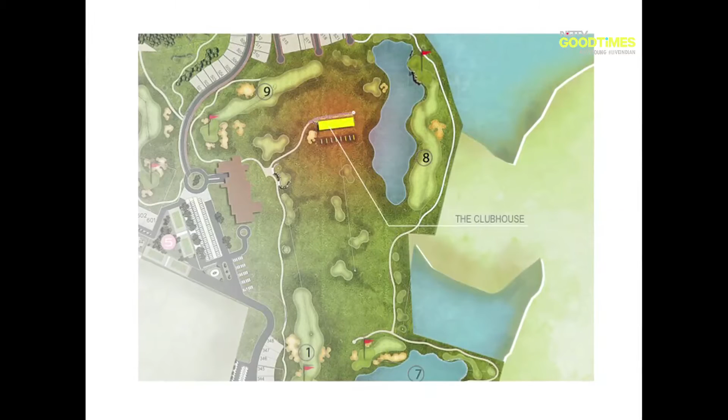So the yellow box there is the site, and all around, as you can see, is the golf course and beautiful views. Considering the location, these are the kind of views you see from the site. So we thought it would be almost criminal to enclose any space at all. We thought of a fabric canopy over, and then we completely lost the walls - so it was just a deck kind of space.

Since these are the kind of views available, we decided to drop the walls and have this light fabric roof. So the only thing left was the floor. The main design element became the floor, and we looked at how to work with it. This is the plan of the area - the white portion is the deck, the seating area with the bar, lounge, and a little cafeteria scenario.

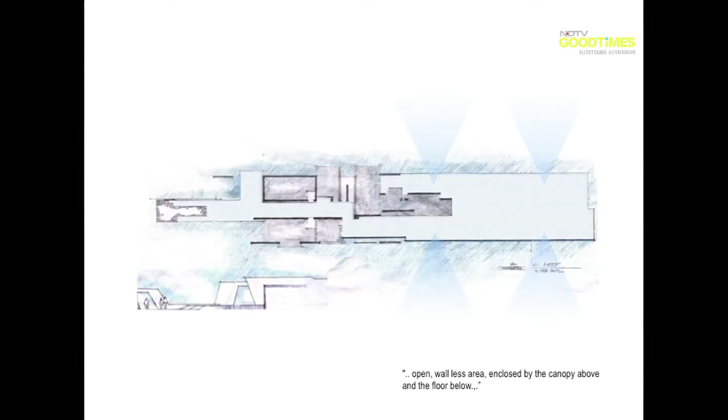When we looked at what kind of flooring to do, we decided on granite because we're in Karnataka, Kolar. This is the kind of thing you see on the way to Kolar, in and around it. The stone seems so light and almost weightless, and in spite of being a very heavy material, we wanted to try to get this quality of lightness, that floating feeling - that's the only thing we focused on.

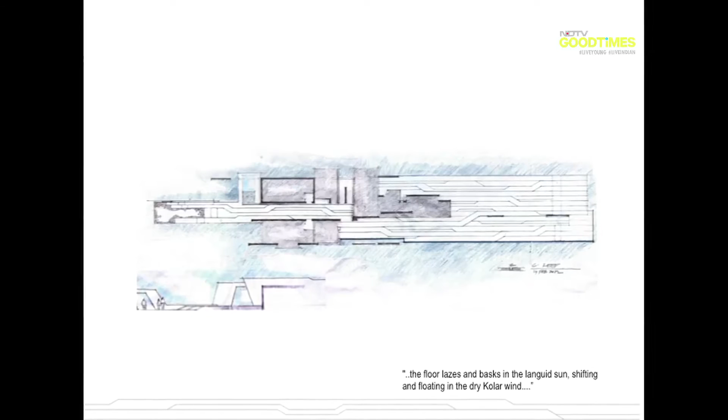So we started off cutting some grooves in the granite and letting it flow. Once we started doing that, we made some models to understand how it was going. Then we felt the lines would make the stone flow too fast, so we had to slow down the flow of the stone.

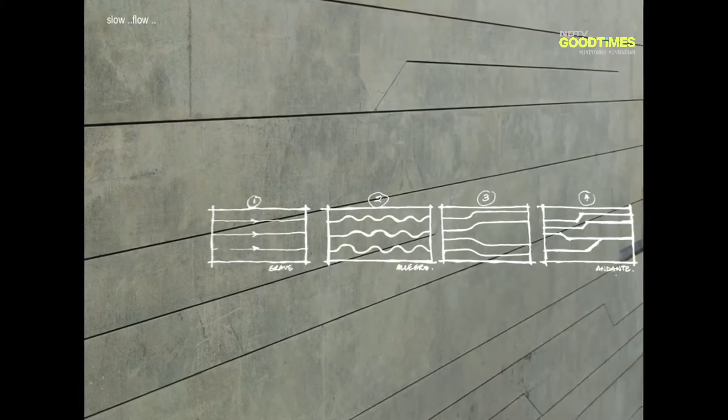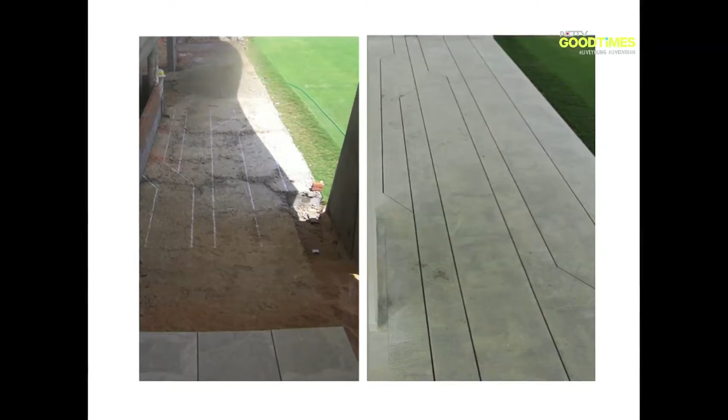For that, we started cutting jogs into it and varying the widths of these ribbons, or the spacing between the grooves. We ended up with something like this, which was a more gentle flow we were able to get with the stone. These are some pictures on site when we drew the lines on the floor to figure it out. All the other joints disappeared once we did these larger grooves.

So the second thing was, since the stone was flowing, we thought we'd detach it off the ground. Instead of embedding it into the grass, we lifted it slightly, about 5 inches, and that had the effect of making the whole thing float over the grass.

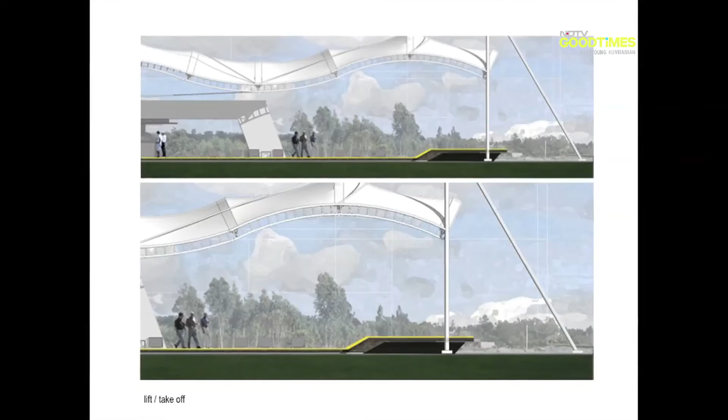Then we decided to look at one end of it at a different level, so some people would sit at a different level, most at the lower level, which can also be used as a performance space. We lifted it up and tilted it, which made it all the more lighter. So we ended up with something like this.

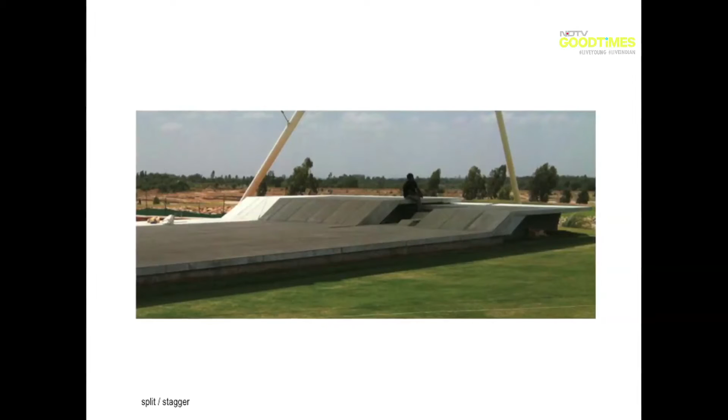When we started doing this, we realized we should split the deck into two to make it even lighter - it had become like a barrier at the end. So when we split and staggered it a little bit, we found it had a much more delicate floating feeling.

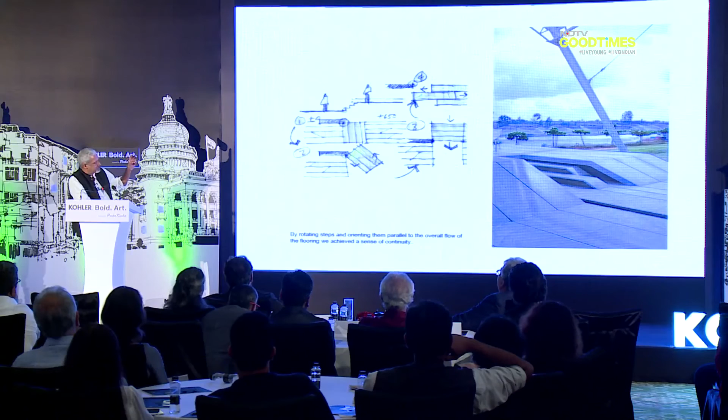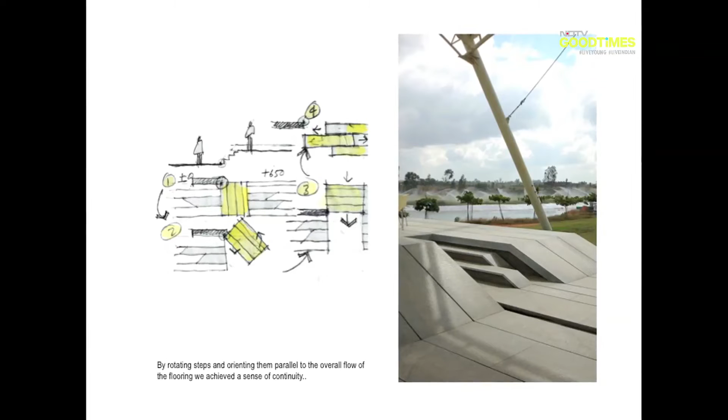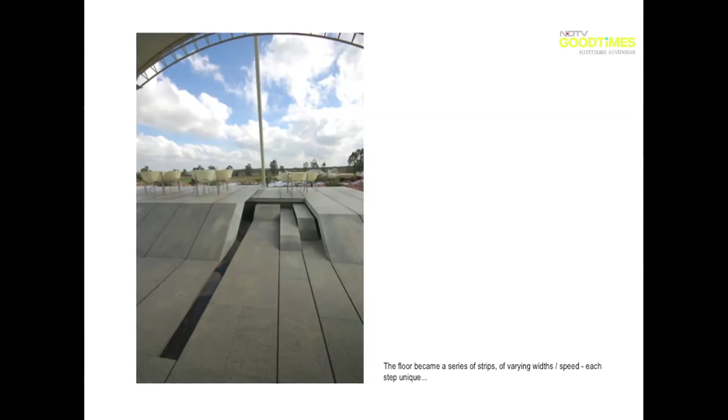Then, of course, when we come to the steps leading up to it - the steps are always perpendicular to the flow - we decided to pull the steps out, rotate and turn them, pulling a couple in and out to align with the flow. It became a very seamless, ribbon-like thing.

We were very happy because in this entire project, what we looked at was the flooring - there are no walls, just this canopy on top. So what we ended up with, by focusing on something very basic like what kind of flooring and material to use and how to use it, was a lot more than we expected in the beginning. So as you can see, there are no walls, just this fabric thing and the stone flooring.

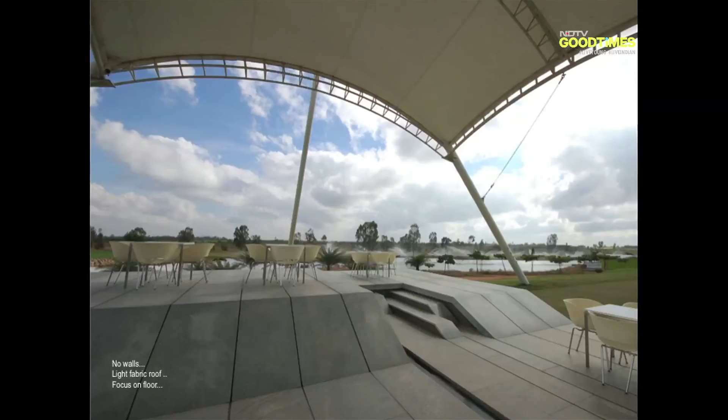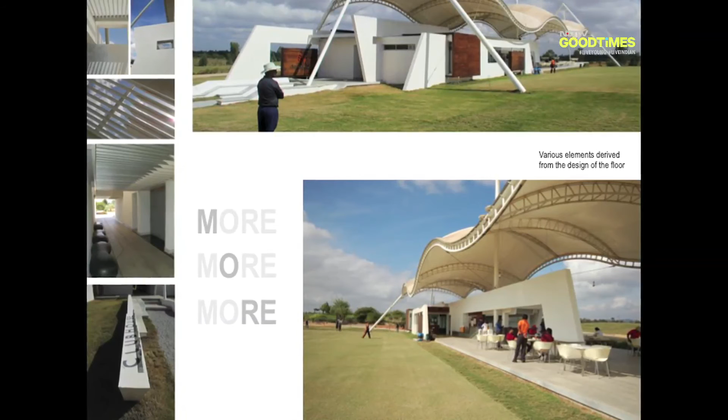One of the things was that when we took this deck, there are some locker rooms and other built structures there. So we took some of these lines and angles and applied them to the main building, into some louvers and pergolas and things like that. We ended up with something probably Mies would turn over in his grave for, but we feel we did a pretty good job by focusing on a very small thing and allowing it to give more.

So all these words and stuff - at a certain point in my life I used to think about them. Now I don't even think, actually - I just do stuff, and I focus on very small things and see where it takes me. So that's my story. Thank you.